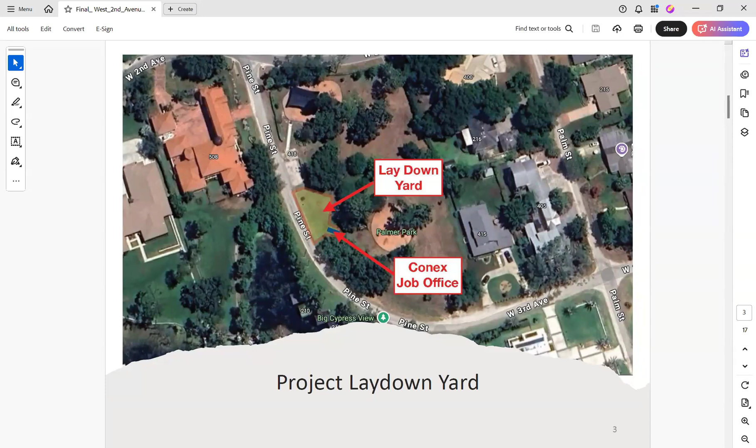You want to go to the next slide, Tanya? Hey John, on this one you have to cover the surveying and the water lines, and then we get into that on the same slide. Okay, yeah, sorry, I thought that slide 4 kind of shows the overall project. That may be a better place to talk about that.

So as you've seen, right now the project goes all the way from the cul-de-sac to Main Street, and you'll see that on the following slide as well. It includes stormwater capture and conveyance, new drainage structures, roadway grading and curb improvements, as well as water main improvements along the entire path of the project.

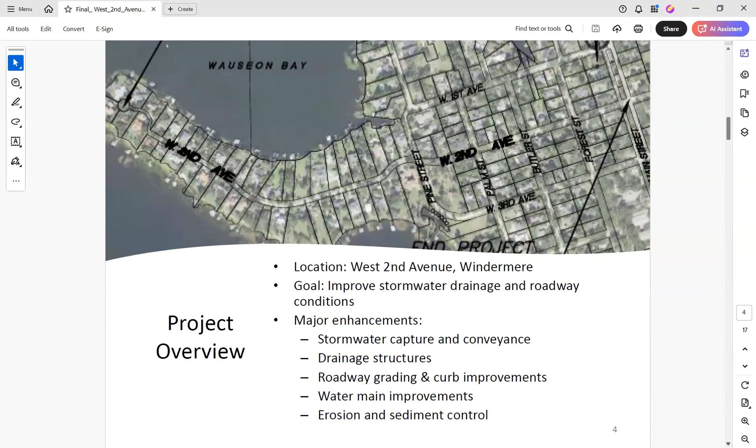One thing you may have seen over the last week is stakes have started to be set. Those stakes that have been placed in the ground are really just defining the right of way versus property lines. So as we set those stakes, if anybody has any questions, feel free to reach out to me. Those are the delineation of the town's right of way.

So not necessarily meaning the extent of the impact to your yard, but just defining where the property line is associated with the right of way. In addition, as you look deeper into the plans, you may see where we've put meter boxes for each one of the water connections to your home.

We've had previous conversations with both the contractor and Orange County Utilities. We had to show specific locations just to make sure we had those located on the plans for cost purposes. But Orange County and the contractor have said that as we go and begin to drop those water connection points, we will coordinate with each one of you homeowners and stake it to make sure it's in the best location for you for future water connections.

For example, if we're on the left side of your yard where our water connection is currently shown, but your water connection is actually on the opposite side, we can make those adjustments in the field. We have the cost already included to bring them. At that point, it will just be us coordinating with Orange County Utilities and our contractor to ensure we're putting your meter box in a location that's most convenient for the residents.

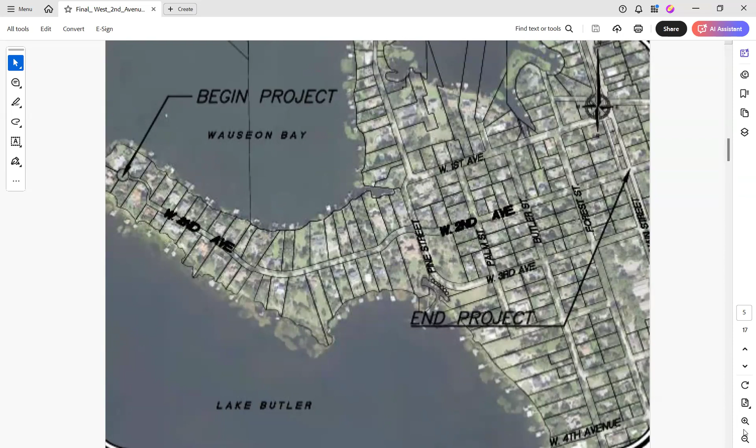Thank you, John. The drainage for the project will be split up into several segments. We've done this in the presentation to give you an idea of how the drainage will be constructed by Cathcart. The first segment we'll start with is the cul-de-sac, which will probably be the most challenging because of the tight quarters the contractor will be working in.

This section of West Second Avenue probably experienced some of the worst flooding because it was so low and the roadway profile didn't allow for the water to drain. There was some drainage there, but it was not effective and was undersized. So we've put in a French drain system that will adequately collect any runoff within the cul-de-sac and allow the water to evacuate vertically into the aquifer.

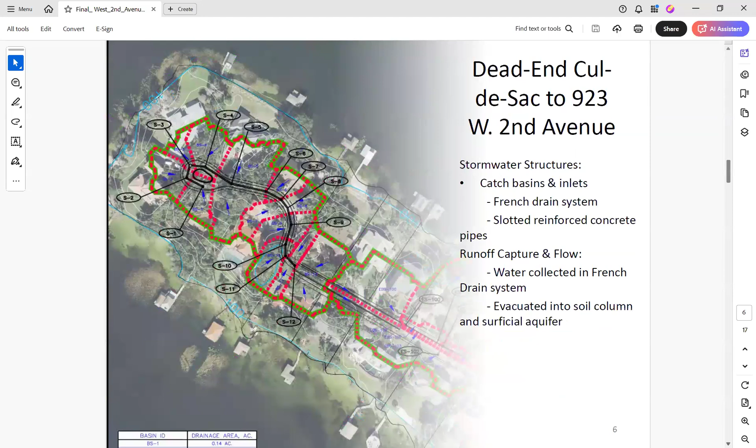This section of improvements will go all the way to where the town has already completed drainage improvements. You can go to the next slide, Sonia.

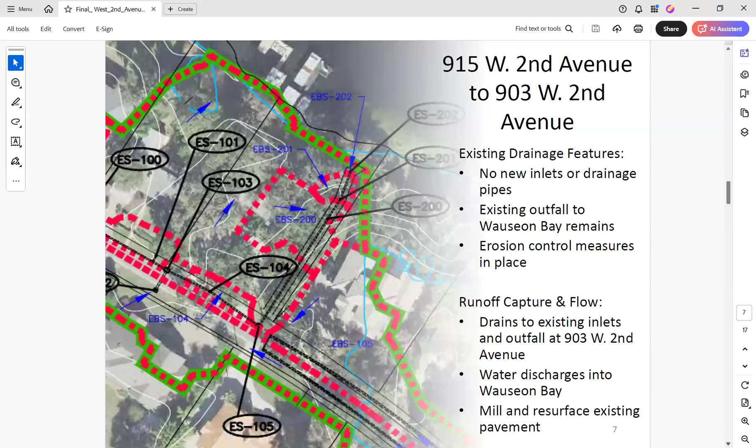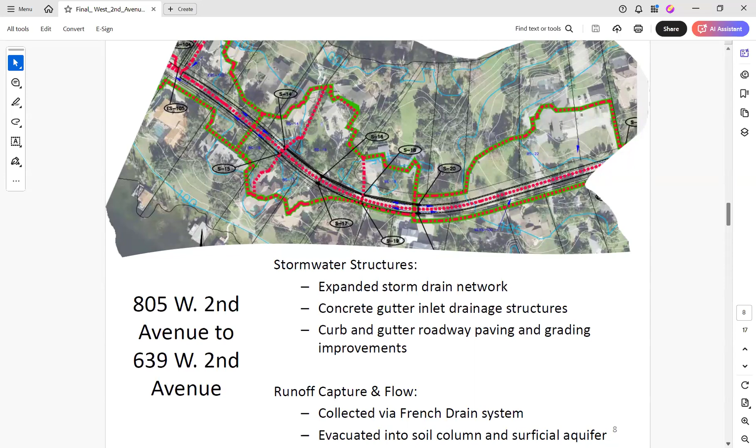Again, this area will be drained with French drains, and the water will be evacuated into the surficial aquifer.

This next section of road is also one where the town had done previous drainage improvements. We've actually constructed a dedicated outfall to Lake Butler to the south. The one thing we'll be doing is enhancing the ability of the roadway to collect water that may be standing in it and take it to the same system. We will not be increasing the volume of water going into the system, but we'll be improving the system's ability to collect it and prevent water from pooling on the surface.

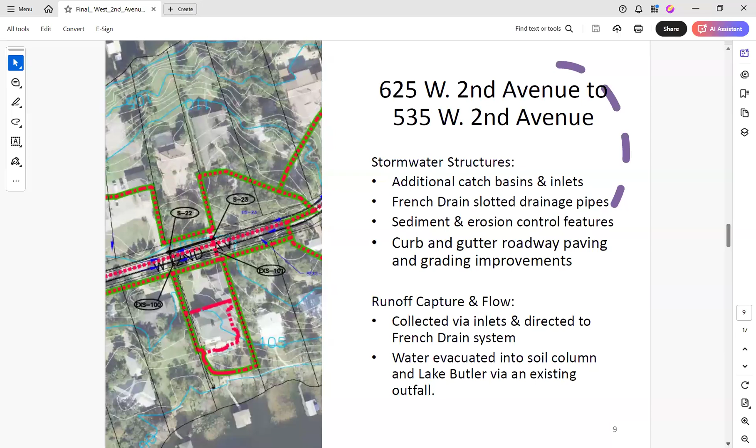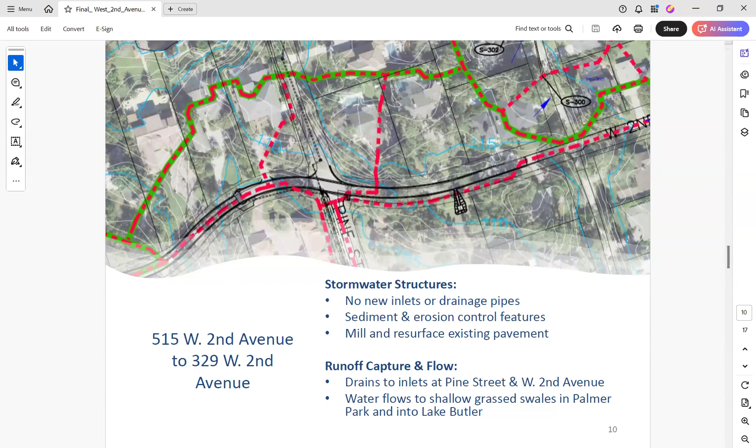The final section will be probably the most complex of all because it extends from essentially Pine Street all the way to Main Street. We will be constructing a dedicated drainage system along West 2nd Avenue to collect water that currently spreads and goes into adjacent properties. It's not contained, it's not confined. So we'll be collecting that water and connecting it into the First Avenue and Forest drainage system.

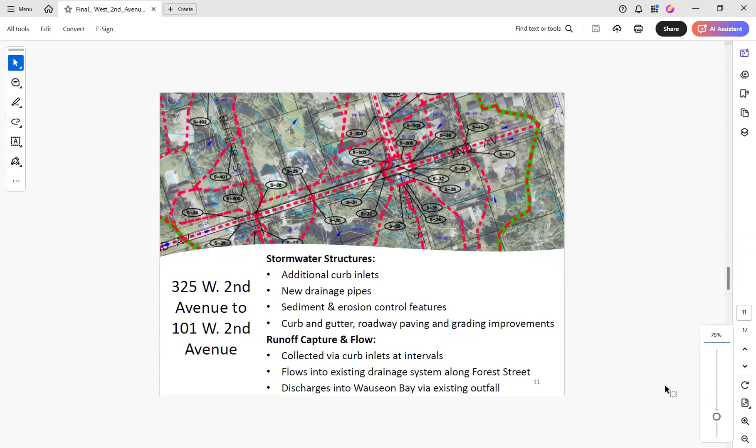The First Avenue and Forest drainage system was already sized to accept water from the future improvements along West 2nd Avenue. So nothing has changed as far as the volume of water being directed to that existing system. That system was previously constructed by the town and permitted by the South Florida Water Management District, and is currently in operation.

Just an overall drainage summary: this project will provide improved drainage efficiency for all segments, and improved pavement conditions for all segments.

And that's important because West 2nd Avenue is really a dead-end street, and we want to make sure that road is in good enough condition to allow residents to evacuate if needed during an extreme event like a hurricane, so you have the ability to evacuate to Main Street.

The water will be captured by dedicated inlets. It'll be directed into the surficial aquifer or directed to Wauseon Bay and Lake Butler through existing outfall systems. The enhanced stormwater management will be upgraded through these inlets and pipes and will provide additional water quality prior to discharging the water into the receiving water bodies.

And again, the key intersections here are the intersections at Pine, Palm, Butler, and Forest Street. These are where some of the major collection points are because of the way the road was built and the way the topography in the area was previously established. And with that, I'll turn the slides over to Tanya.

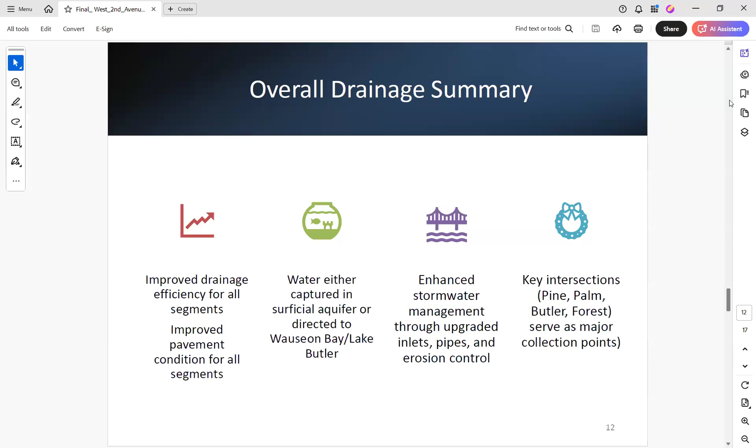Thank you, Mike. I have a quick question. Don't mean to put you on the spot, but as you know, these screenshots I pulled were from your final plan set for West 2nd Avenue. There was a question about these red and green dotted lines. Could you explain what those are briefly?

Yes. The red dotted lines represent the limits of the contributing drainage area to each one of those specific inlets. So at S401, you see a little triangular piece there - that's the expected drainage area that goes into that particular inlet. The green line is just the overall basin boundary of the watershed, the overall boundary that drains into this part of the drainage system.

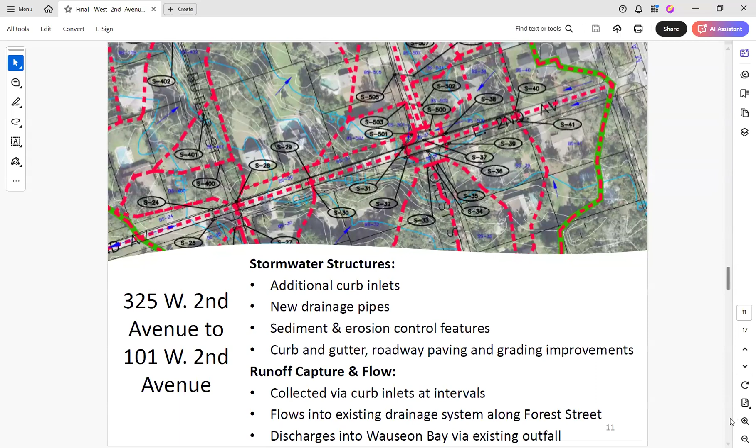Thank you, Mike, I appreciate that. So with that, I am going to welcome Ryan Whitmer from Cathcart Construction. He's the project manager for this project, and we're going to go through how his phasing will work and how they will proceed forward with the construction work, because I know that will be something that's important to the residents. So Ryan, I'm going to turn this over to you for the construction process, starting with phase 1.

Absolutely. Good afternoon, everybody. Starting on phase 1, which would be the cul-de-sac area you see at the very end highlighted - like Mr. Galore said earlier, that's a very confined area, as you all know. So that's going to be one of our main focus points.

We plan on doing the French drain and the water main concurrently. Doing it that way will add a little bit of time to the job, but that's the way we can ensure that residents will maintain access throughout the entire project. There are 12 structures running through there, so our game plan is to go from structure to structure with French drain and water main concurrently. Once we get past that red line, we'll drop back and fully restore that entire area, including services, sod, and restoration, before we continue to the next area.

Like Miss Tanya said - or I'm sorry, Mr. John said - we will reach out to each resident individually. We'll put a stake where the service is shown to go, talk to you guys, discuss it with you. If we need to move it, we will get with Orange County, make sure they're aware of it before we move it, and we'll keep you updated on the entire process.

Phase 2 is what you see here in red. This is going to consist of water, storm, and roadway improvements. Our game plan with this is going to be the same thing.

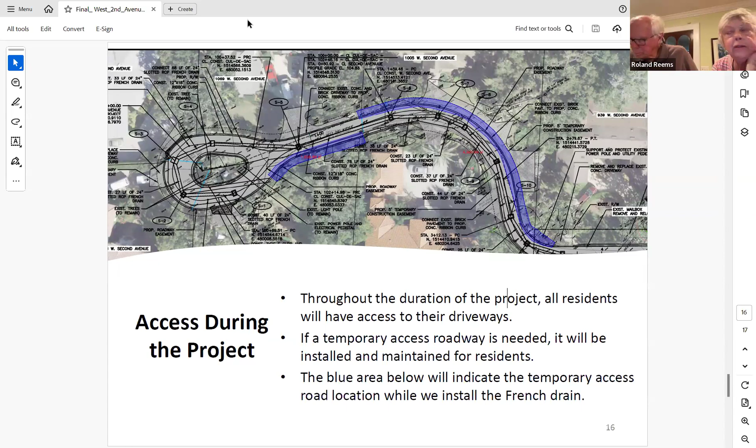Did you say on Phase 1, which is the cul-de-sac, that starts April 7th, and you would estimate that phase would take 100 days? That's 3 months, correct? Yes ma'am, Phase 1, not what I see on the screen, but the cul-de-sac. Yes, ma'am, that is correct. Okay, just wanted to clarify that.

Thank you. Okay, I'm going to go. You can just let this die. No, you don't need to.

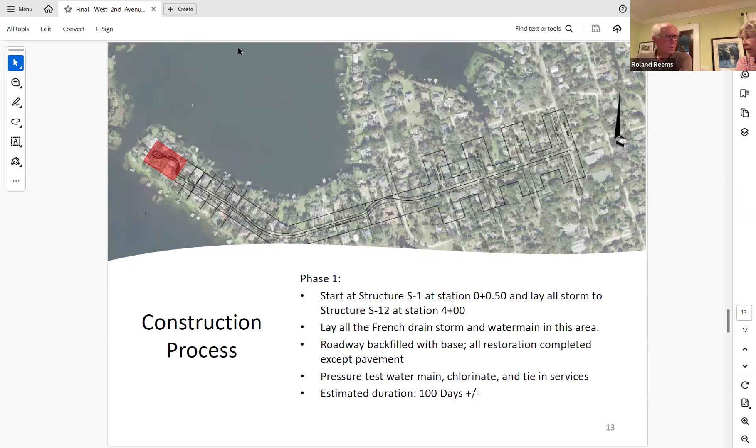Okay, I do not see any more hands raised at this time. So do any members of council have any questions? Mayor, do you have any questions? You have another question in the chat box. You can contact Public Works at the town if you have any questions or concerns.

So I just have a quick question. Does all of the water from the project go to the east or not? That's my only question, and if not, where does it switch? The only water that goes east, if you're talking about the First Avenue and Forest Street drainage system, is just to the east of Pine Street, between Pine Street and Palm.

So only that piece will be directed towards the First Avenue and Forest Street drainage improvements. Is that Phase 3 on these drawings that you guys are showing? Yes, it is in the Phase 3 construction.

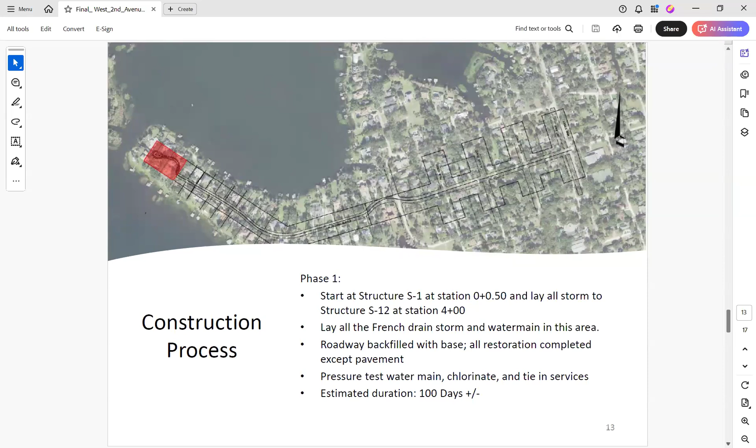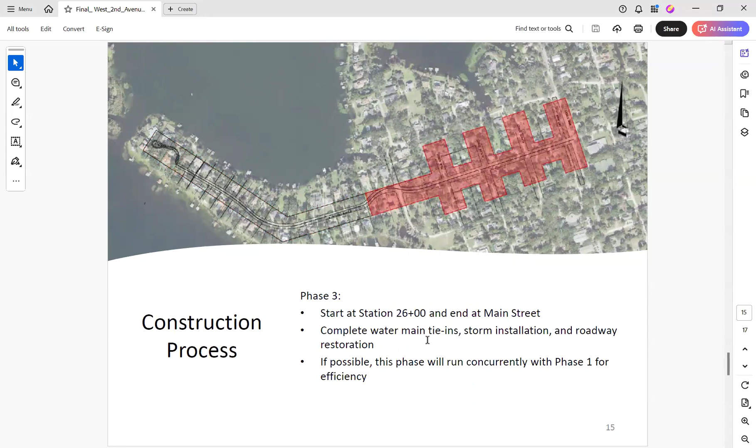And is there any sort of other outfalls or retention swales, bioretention swales, anything like that in the Phase 1 and 2 section? There is none existing. In Phase 2, there is a dedicated outfall that drains into Wauseon Bay, but we are not doing any construction improvements in that area—it's only going to be milling and resurfacing and water main improvements. So the drainage has already been taken care of for that piece. There's another piece just to the west of Pine Street where we have a dedicated outfall in front of Mr. Kirby's home that goes directly into Lake Butler, but it is a very small watershed in relation to the rest of the project.

The other area that has improvements already in place is the intersection of Pine Street and Second Avenue, where we have a dedicated drainage system that drains to Palmer Park, into some swales in Palmer Park, and eventually discharges to Lake Butler.

Okay, so my last question would be in Palmer Park. Yesterday I actually saw some chain link put up, and based on your first slide in the presentation, am I understanding that the area inside the chain link fence is going to be like a staging area? It's what we call a laydown yard in construction, Brandy. Any construction project needs a laydown yard in which we put materials and supplies that need to be taken out and installed as part of the project. So that's the laydown yard.

Okay, so my question then would be when we start getting into the rainy season, what happens with all that stuff that's going to be underwater? Because I know, even back at Halloween, there were all kinds of cars stuck in there, and it's been wet most of the season, even since we hit our dry season.